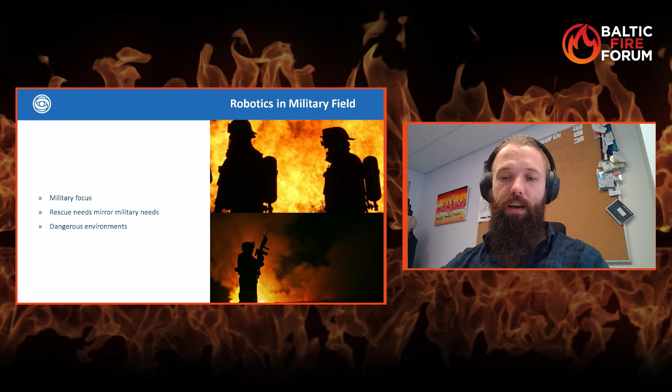But we also have similarities in other fields, and definitely the rescue and military worlds mirror each other. We also need to take people out of harm's way in military scenarios, gather timely and relevant information, and just make better decisions. We're pretty much operating in hostile and inhuman environments, and the main focus in all of those aspects is still to bring humans out alive. So saving humans is critical in all of those scenarios.

So, a few words about Milrem. Our mission is to provide innovative robotic solutions for challenging environments. We believe that our cutting-edge robotic solutions fulfill a higher purpose, enabling more meaningful lives. We are located in Estonia, our HQ, and we were established in 2013.

So our customer portfolio - we mainly have military clients, so NATO countries, 7 of them, and also in Asia we have a few countries that are our clients.

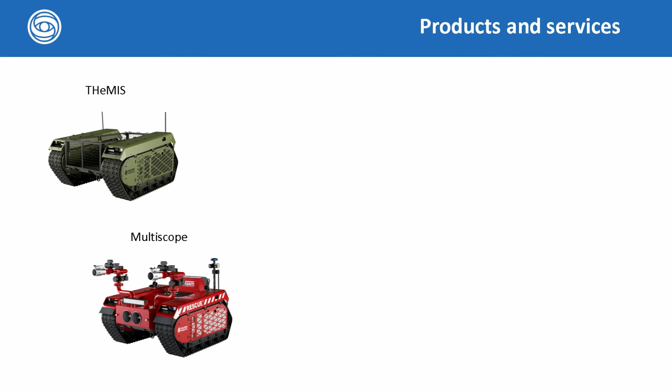Our second product is Multiscope. It's a UGV combined with know-how collected from extensive testing from THEMIS and is now implemented in the civilian sector. We also have a much bigger platform compared to THEMIS, which is like the size of a tank, kind of, and it's intended to support mechanized units and act as a wingman to main battle tanks.

We also have an intelligent functions kit, which is pretty much a package that includes the necessary hardware and software to modify any vehicle to give it unmanned control and safety functionality. And the last thing I want to put emphasis on is that...

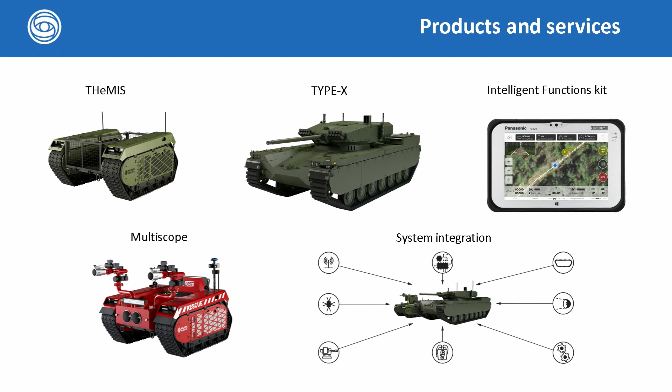We need to put different types of systems together, and we are always specializing in that. For example, when you take THEMIS, you want to insert a different type of platform and want to work it together with troops - then it's 3 different systems that need to be working together, and that's something we are doing as well.

So now let's go deeper into the rescue field. Our main partners in the rescue field have been the Estonian Rescue Board, whose input has been undescribably valuable for us, and also widely recognized experts in extinguishing fires, and our payload provider, InnoVfoam from Netherlands.

So here is our main platform, the Multiscope, and now we will go see how it's built up and what it does. So it's a diesel electric hybrid.

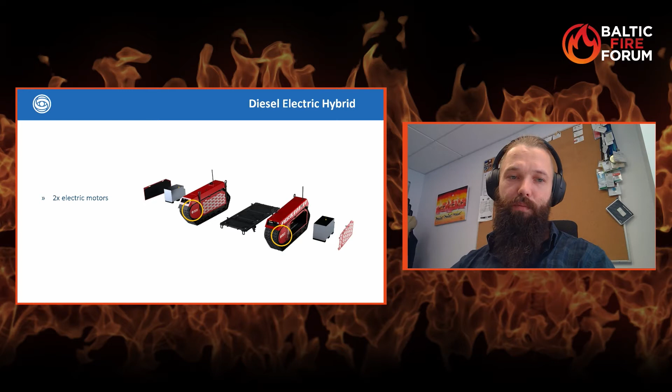It has two electric motors located in the front of the track. The vehicle always uses electric motors for driving. It has a battery block, and the diesel engine on the right side is continuously charging the batteries. So the runtime for this hybrid solution is up to 15 hours.

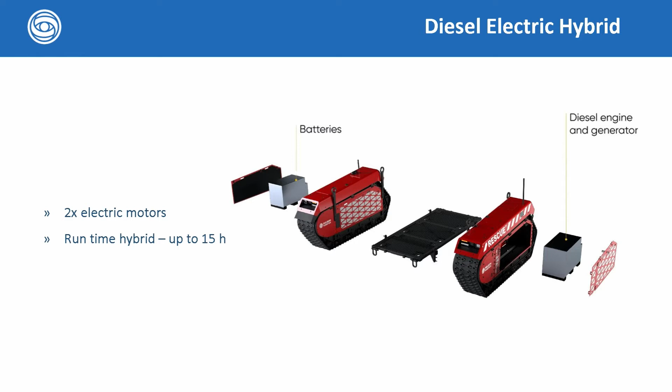Now you will see a video of the capabilities of the UGV on a terrain.

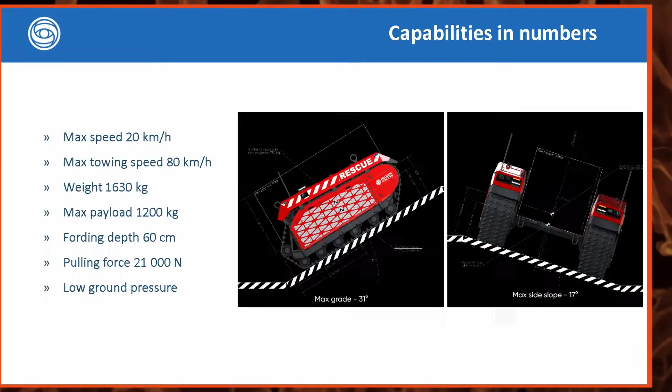So let's now unpack a little bit what you saw. As you can see, the vehicle is really capable - it can drive up to 20 kilometers per hour, and maximum towing speed is also quite high.

Even though due to its small weight, it has a lot of different advantages. The nominal payload is 750 kilograms, and all the specs remain achievable with that. However, the maximum payload is 1.2 tons. It can cross water obstacles as deep as 60 centimeters. And as you saw in the video, we tested in a Mali deployment where we pulled a 32-ton armored vehicle.

And also, due to its tracks, it has very low ground pressure.

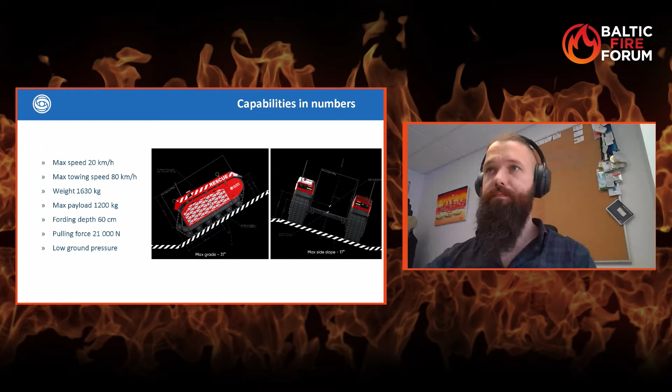Also, another important aspect to understand is its modular architecture and design. The center frame is adjustable, so the ground clearance is adjustable, and the only thing actually connecting two modules is a cable - there is no mechanical connection between the central platform. That enables us to customize the measurements of the vehicle as needed for the customer.

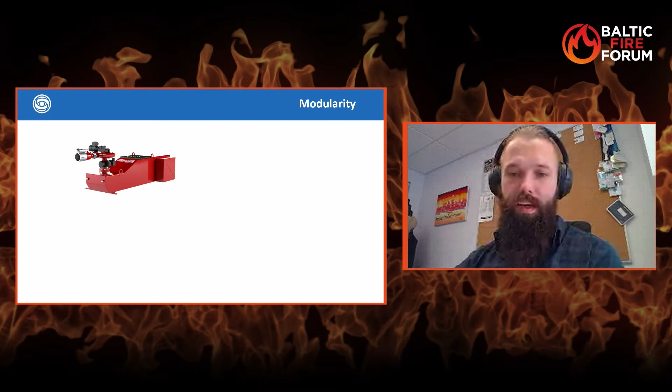Also, another cool thing is that you can add different types of payloads and increase the capabilities. So, for example, you can add fire monitors with different power supply, and you can replace the water tank with a fire monitor.

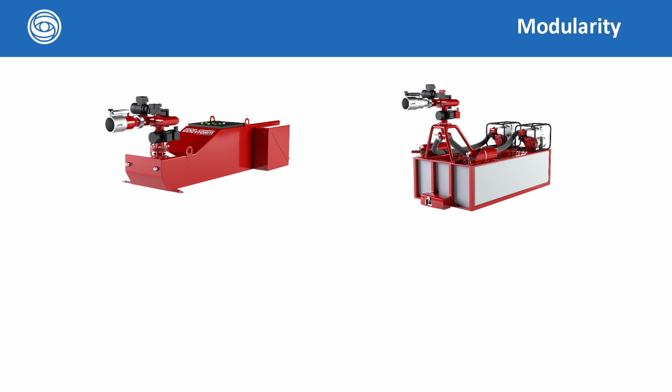Also very helpful for firefighters would be a hose laying system, and also a system that you can carry and collect. And in the picture you can see the additional hub for a tethered drone, for having, for example, an 80-meter high observation point, or to relay radio communication. So the flight time for the drone is basically unlimited due to the tethered version.

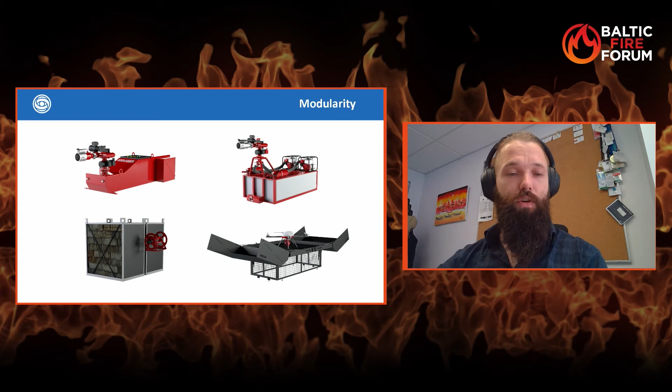Also, it's really easily interchangeable - it only takes 5 to 10 minutes, depending on the procedure, to release it and put the new payload on.

So taking all of those things into consideration, you can see that there are a lot of different options. This is the kind of product family we are dealing with at the moment, and in the middle is the first one, called HYDRA.

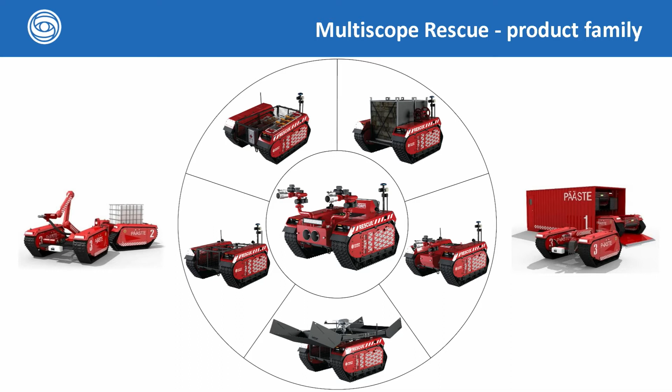But during this time we have evolved a lot from duct tape, and we actually have a real solution right now, and it's called HYDRA. We will go and look a bit deeper inside that as well.

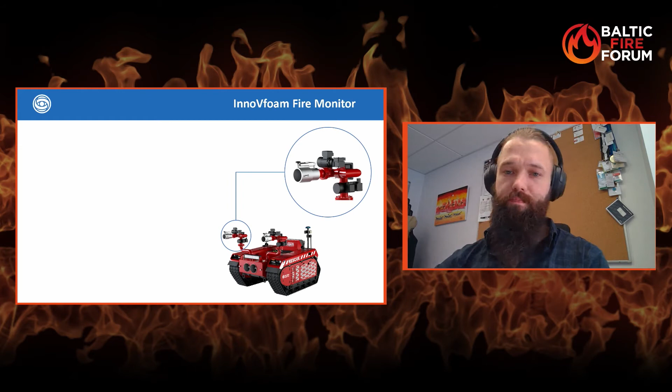So first, we're going to talk about the fire monitor. It can supply up to 3,000 liters per minute, but it's adjustable - you can change the fire monitors to lower ones or bigger ones if needed. It has 360-degree maneuverability, it's radio controlled, and it can use water and also foam. Depending on the pressure of the water, you can extend the throw length up to 62 meters. But if you change the fire monitor to a more powerful one, the throw length can be even further.

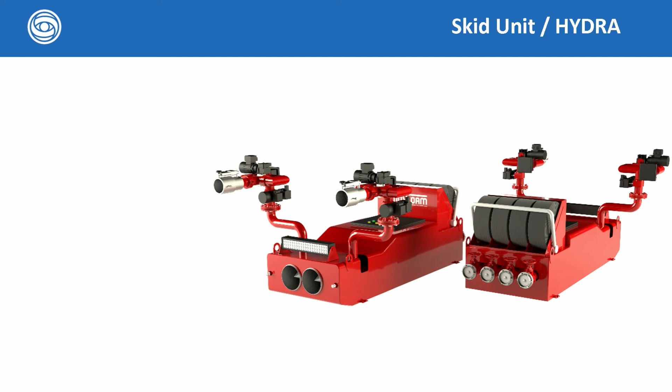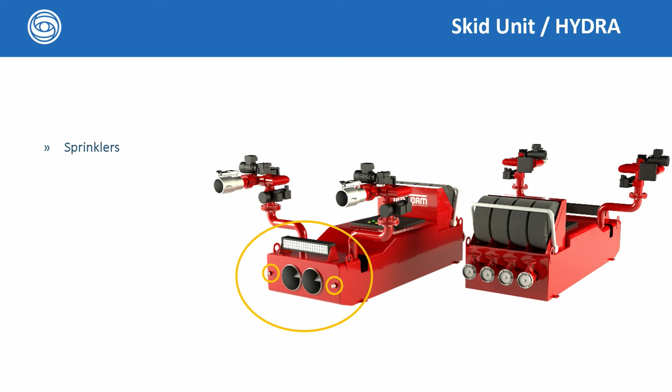Now let's look at the bottom part of the HYDRA, the skid unit. In front, you can see there are two sprinklers meant for cooling down the front side of the vehicle. In the middle is the control unit that does all the decisions between the radio and the fire monitors. There are four fire hose compartments and four hose connectors. In the front, there are expansion generators for generating a foam blanket, and also an extra light source just to give some extra lighting on the scene.

It's also easily transportable, and due to its small weight, it's portable even via air. This would significantly reduce the reaction time for actions that are far away. You can also attach it to the truck - it's a really easy solution, and for small distances this is really a fast option. But if we start talking about longer distances, then it makes sense to put it on a trailer, so you will be reaching the accident site faster.

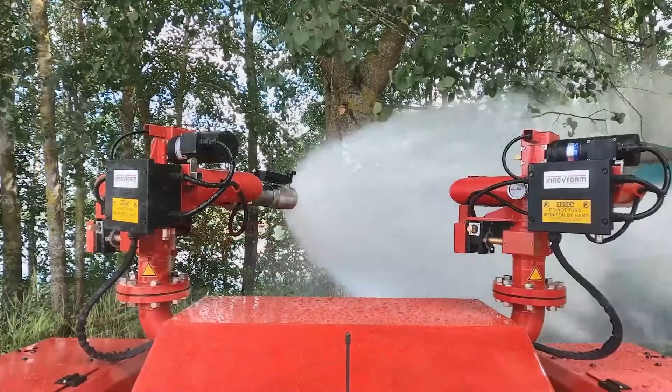Now we're going to look a bit into experience and use cases that may come up. For the firefighters, the overall bigger concerns are that the environment where they need to work changes rapidly, the structure is new, and there may be new danger zones that people are not aware of - also different types of gas tanks, especially mobile ones. From time to time an accident happens, and it can become a disaster really easily when we're not able to get close enough.

Also, as I mentioned before, the military polygons with unexploded ordnances. In the summertime, sparks happen easily, and big field fires can come out from that. So it's really important to mitigate and act fast on those occasions. It will be very useful to have unmanned vehicles with low ground pressure to extinguish those situations as fast as possible.

Also related to the previous point, in a dry season, small sparks can become disastrous in the forest area, and a lot of manpower and resources are needed to mitigate those. For example, UGVs could really easily help build hose networks on difficult terrain, speeding up the whole process a lot. Lastly, hard and limited accessibility areas like railroads and narrow streets would be a perfect place to ease and reduce response times with unmanned systems, by either carrying more equipment closer and faster, or getting the water lines and fire monitors closer to the primary source of the fire.

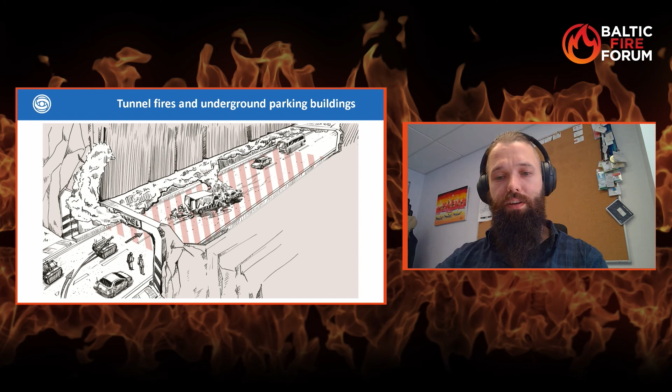For one example from Switzerland: about one mile from the exit, there was a car accident, and it got filled with smoke and had numerous casualties. In this situation, UGVs could be used to bring in ventilators, or even just keep the temperature down, and send the vehicle in to get access to real feedback from the accident and better intelligence, so firefighters are able to react better to the scene.

And also, the last use case would be a disaster relief scenario, where UGVs could help take a big load of equipment closer to the disaster site, because resources in that kind of area are always limited. The UGV is a perfect choice because you have one vehicle for several functions, and you can do a lot more than just transport the goods.

And this is actually how we provide innovative robotic solutions for challenging environments.